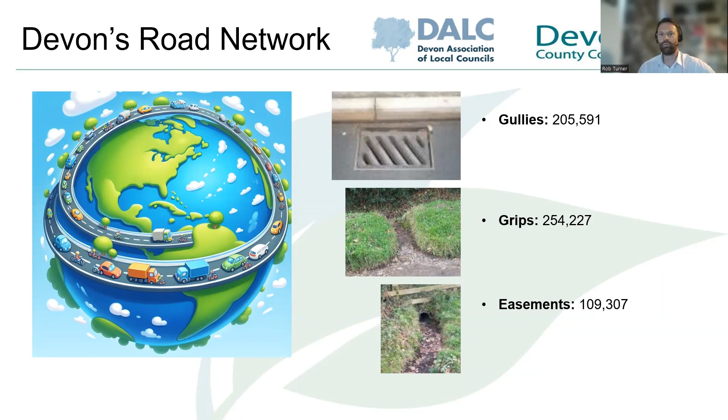You'll also note on the right-hand side here, drainage is always topical. Some of the words in that word cloud, you're probably thinking, what on earth is an easement or a grip? Hopefully that picture will tell you what they are. But gullies, we've got over 200,000 of them. Grips, over 250,000, and easements, over 100,000. We're talking big numbers here, which we have to maintain. So next slide.

So how on earth do we go about that? As well as a legislative framework, we have a code of practice. You can see the latest version there, the Well-Managed Highway Infrastructure Code of Practice. Although it's not a statutory requirement, DfT advises that local authorities follow the code to meet their legal duties to maintain the network. The key takeaway from that code is it promotes the adoption of an integrated asset management approach, which we'll come on to.

Authorities also need to develop asset management policies, strategies, and plans. These should be based on a local risk-based approach, resulting in the development of appropriate maintenance strategies. Okay.

Just highlighting the bottom thing, which is about the incentive fund. In terms of asset management, and we'll explain what that is in a minute, I think it was 2015 that they released the incentive fund, and authorities were given extra money depending on what band you were in, based on how you could demonstrate that you'd adopted asset management approaches. Devon got into band 3, so we secured the highest available funding. We'll go to the next slide, please.

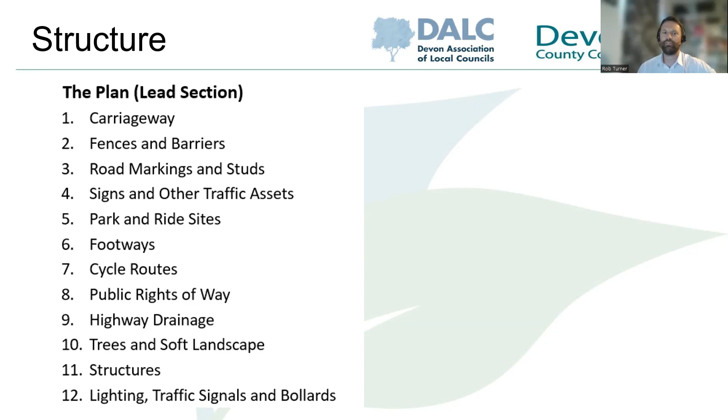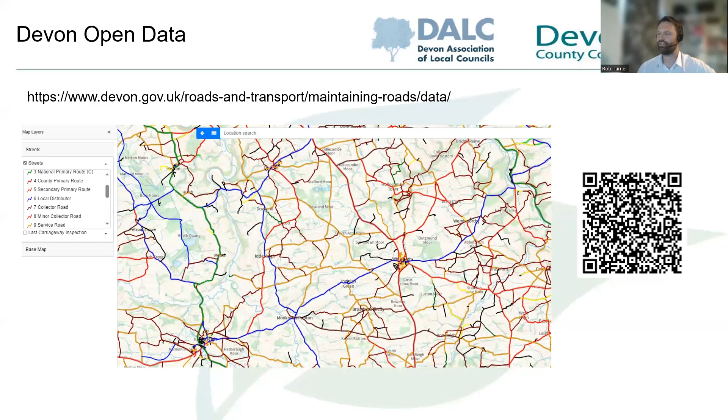So you can see what maintenance category the roads are. This is publicly available as well. So you can go on via that link or that QR code there, and you'll be able to see which maintenance category the various roads are. The little table on the left there will tell you what maintenance category, so you can zoom in and find out which roads are what maintenance category.

Okay, next slide again. So what does that mean in practice? So we mentioned all those different asset groups. This is from our carriageway annex of our asset management plan. So you'll note here that there's different expectations. So again, it's that risk-based approach. We've got different expectations for different maintenance categories. We call that levels of service. So we have different levels of service that we expect.

So you'll see there on the top, it moves from provision of safety related issues only, all the way up to provision of safety, serviceability and sustainability. So we're looking at a carriageway with very localized repairs of defects of a non-safety nature. To the other end, we're looking at uneven, rutted, with multiple repairs and defects of a non-safety nature. So you'll see the pictures there. You see the extremes that we're managing.

So on the right hand side there, that's the A361, North Devon Link Road. And on the left there, you've got a very typical rural minor road. In the middle there, you'll see how that works then. So again, pretty common sense. The higher maintenance categories, like the A361 and the A roads, the level of service we're trying to get to is in that green category. And as you move down our maintenance categories, the expectation and the level of service that we are looking to achieve reduces.

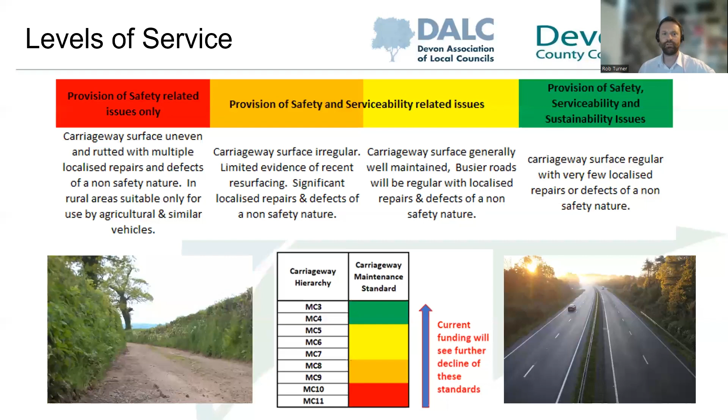What is key to all of this, though, is the level of funding. We've mentioned that quite a lot, but it depends on the level of funding we can have. Think of it as turning a dial. So the more money we get, the more we can move that level of service up. The less money we get, that continues to move down. So the level of service we can achieve moves down, and it moves to more of our network. Okay, so next slide.

We've got resilience and emergencies. This involves managing disruption, implementing recovery measures for severe weather emergencies. And then we've got the winter service maintenance strategy, which involves maintaining in adverse weather conditions, such as gritting, snow ploughing. Hopefully not there yet, but we will be getting there soon.

It is getting a bit cold, isn't it, of a morning?

And then we've got routine cyclical maintenance, and this involves activities like gully emptying, grass cutting, cleaning, those routine activities. And then that goes on to planned maintenance. So that involves planned schemes, primarily of reconditioning, structural renewal. And then we've got preventative maintenance, and that involves activities aimed at preventing deterioration and extending the life of assets. And then we've got reactive maintenance, and that involves responding to safety related incidents and reports, defects, potholes, obstructions.

We're going to quickly go through now. So we'll go through planned, preventative and reactive, and sort of give you an example of the kind of maintenance that involves. Okay, if you want to go on to the next one again. So the first one I mentioned was planned maintenance. So that involves the renewal of the surface course layer of the road, and where necessary, depending on the level of the damage, reconstruction of the deeper structural layers.

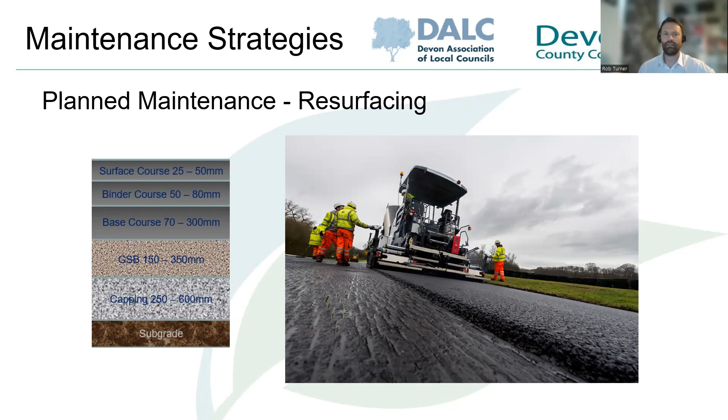We've got preventative. So as mentioned, resurfacing is not really financially sustainable, and ultimately it's a sign that we've got to that road too late. It's deteriorated too far. So ideally what we want to do is intervene earlier and stop it deteriorating to such that level in the first place. And that's where preventative maintenance comes in. So it's important that the road surfaces are sealed to prevent water ingress and prevent road deterioration. That's your main cause of road deterioration.

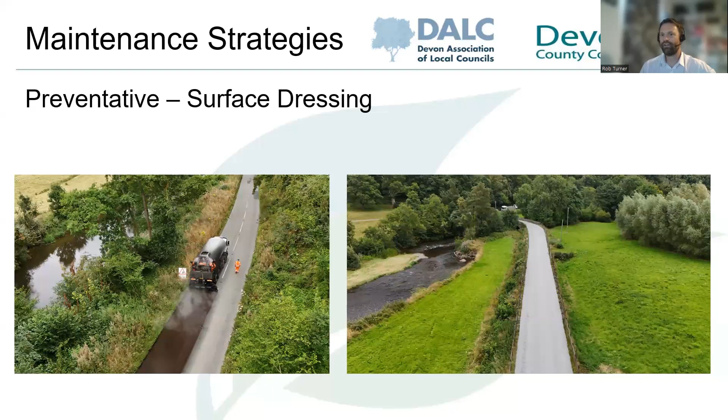So surface dressing is a process of sealing the surface, improving the surface texture, and prolonging the life of the road for many years. It's speedy, efficient, economic preventative maintenance. It's more rural based, so more based on the rural network. Doesn't alter the level of the carriageway. It doesn't last as long as resurfacing, however, it costs considerably less. If you go to the next slide, we'll start it off early.

So it's quite a nice overall view, and see if I know where this one is actually, so we will see what part of Devon this is. Makes me want to visit it, to be fair.

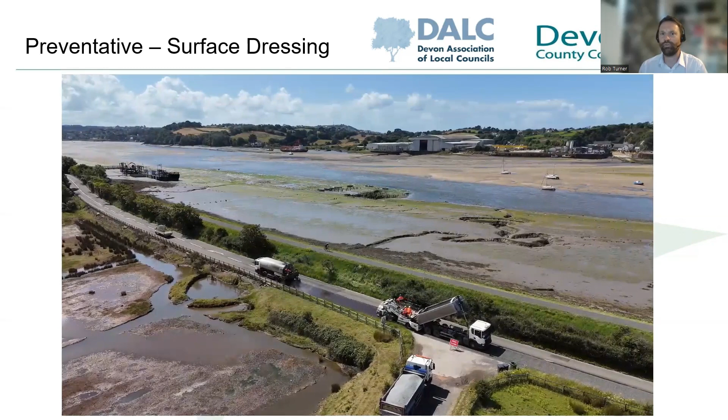So what we've got here then, you'll see a calibrated tanker sprays a thin film of hot bitumen onto the road, and then a metered spreader puts hard chippings onto the bitumen. These chippings are then rolled and pressed into the bitumen to form an interlocking surface. The road can then be driven on with care, with any loose chippings swept away as part of a sweeping regime, and then the road markings replaced. Okay, so you can see that process just happening there. So if people aren't aware, this is Instow, around there. Okay, so I think you should probably stop that video. It's probably enough to illustrate the kind of process we've got there.

Okay. There we go. So we've got a more urban based version of the same concept. So again, working on the principle of sealing the road, improving the surface texture. So this is micro, more urban. This is a dual process application. So the first process regulates the existing surface. The second one provides the final surface. So the surface doesn't need to be rolled, with traffic helping it to achieve the strength. So it needs traffic driving on it. As the surface is slightly raised, the ironwork is raised afterwards, and sweeping again is undertaken and lines go back.

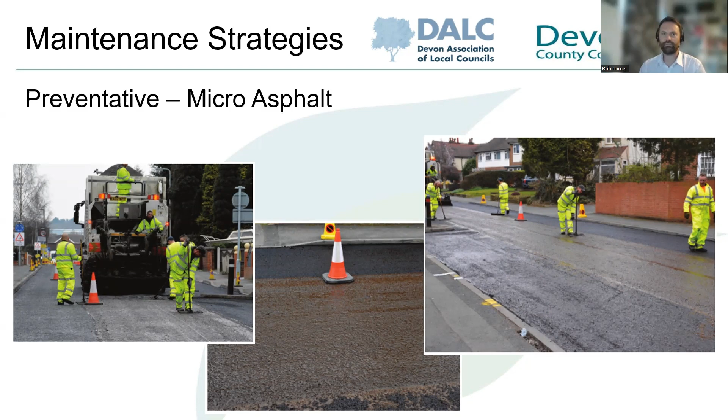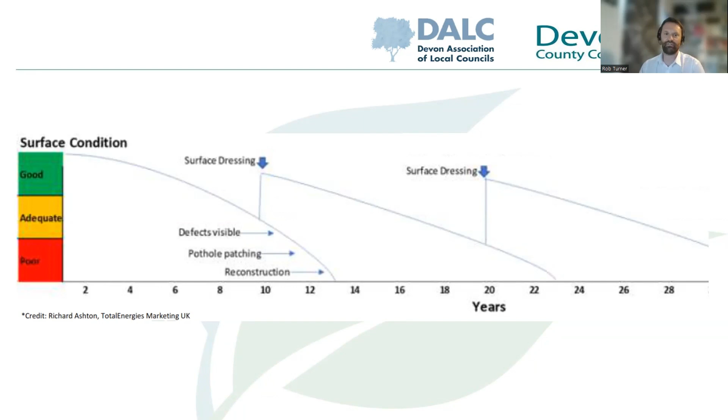But the public will say, well, why are you doing this road? It looks fine. That road's fallen apart. We can't tackle all the ones that have fallen apart. We need to have a mixture of strategies, which I guess is the key concept of what we're putting across there from a preventative regime. Okay, the next one there, please.

So again, a number of factors, though, unfortunately affect our ability to make and implement long-term maintenance plans, such as preventative ones. So that deterioration curve, let's be honest, is very idealized. Lots of things affect that. So again, we've got climate change, inflation, the cost of our maintenance compared to 5 or 10 years ago has nearly doubled. We've got an evolved network as well.

We've got some roads which are, you remember the slide on the resurfacing, the makeup of a road? Well, not all our roads are made up that way. In fact, not that many. We've got a lot of our roads, our rural network, our lower category roads have just evolved from dirt tracks. So they haven't the structure. So again, they are going to deteriorate. That curve on the preventative side is very idealized, and therefore it will deteriorate at different times.

Traffic volumes have also increased, and we get very high traffic volumes at different times of the year as well, being a very rural county, with holiday makers, etc. The nature of the traffic as well. The farming vehicles have got bigger. The vehicles have got bigger. They've got heavier through electric cars, etc. All these things are making those deterioration curves more challenging and difficult to interpret. So you go to the next one.

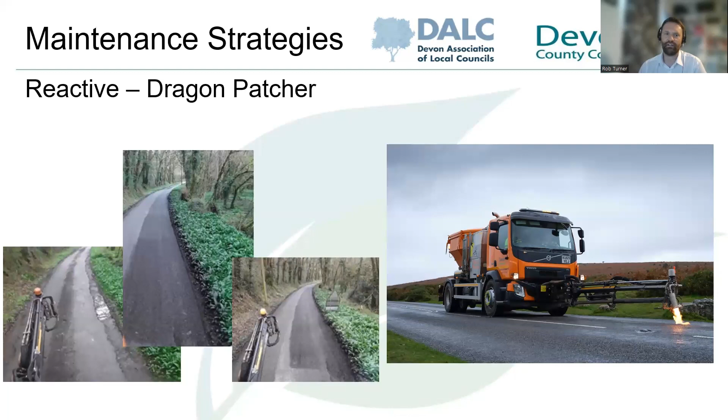So again, they won't last as long as the typical resurfacing, more holding the network together, but more than just potholes, extending that area that can be treated on a reactive basis. But this is still a reactive strategy. So not just filling those individual potholes, we're trying to make it go a little bit further. So again, next slide, please.

So this is, again, another arm of our reactive strategy, which is serviceability patching. That sees the provision of dedicated hand patching gangs across the county. These gangs are able to work on more of a reactive basis to address localized areas of carriageway deterioration using more traditional patching methods, generally up to 50 square meters in area. They're typically slower than the Dragon Patcher; however, they may prove to be more effective when more robust repairs are required, for example, where a more structurally sound one's needed.

So it gives more flexibility to the highway inspectors, allows for identification and capture of larger, more efficient interventions to pockets of deterioration. So again, it's not just those little tiny potholes. We're trying to expand these areas through different techniques, bringing in these different technologies. But again, they are not long-term solutions. They're holding the network together.

If we're able to seal it, going back to the preventative one, the surface dressing, if we can follow them up with a sealing of it. These ones are still going to get water and they're still going to deteriorate, but it's holding that one in, just doing better than just the individual. Okay. So next slide, please.

So I think that's the end of my part of the discussion. Hopefully it gives you a scope of what we have to maintain, how we go about it, how we make the decisions, how we prioritize things, and the different kinds of techniques that we use. So a bit of a judge here now to see what we've learnt. We've got 3 different types of strategies here: the preventative strategy, a planned strategy, and our reactive strategy.

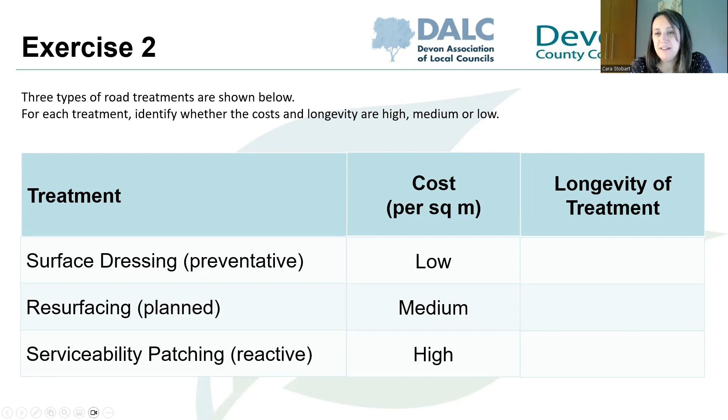There you go. So surface dressing, we said it was low cost, and it is. Resurfacing, medium, and serviceability patching, because of its reactive nature and having to go out there and react, it's always going to be higher per square meter. Could you remind us what the cost per square meter is? Do you have that data? Well, we've got kind of ballparks. So I guess surface dressing would probably be around £5.

Resurfacing, more about 40, 50, and serviceability patching at times up to about 100 potentially. And then we've got longevity of treatment. So again, surface dressing does last a number of years, but resurfacing is going to be the one that lasts for longest. Serviceability patching, as I mentioned earlier, doesn't last as long. It's still a reactive strategy. But if you follow it up with a preventative one, we can extend that life. Again, highlighting the importance of that preventative strategy and getting that across.

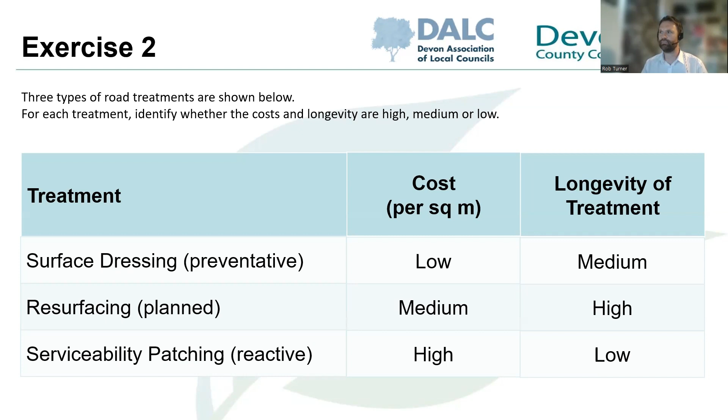Afternoon, everyone. There's 3 topics I wanted to go through before we finish and open up for questions. They are the information that's currently provided, the way we're managing the quality of the works, and topics of innovation that we're working on as well.

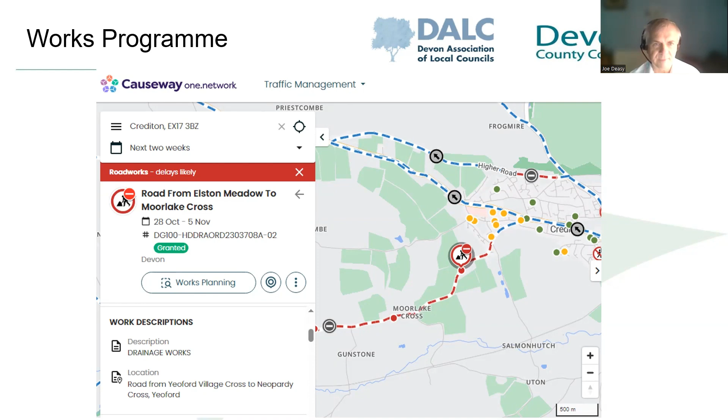This not only guarantees the safety and durability of the highway, but also significantly reduces the potential for future maintenance. Such assessments are vital for the longevity of the highway assets and for the protection of the authority's investment in the highway asset. Okay, next slide, please.

These audits are randomized, but if we see any patterns, for example, in a specific area, we notify the contractor and work is done to actually improve the information or what we're recovering from those audits about what we might want to address or fix.

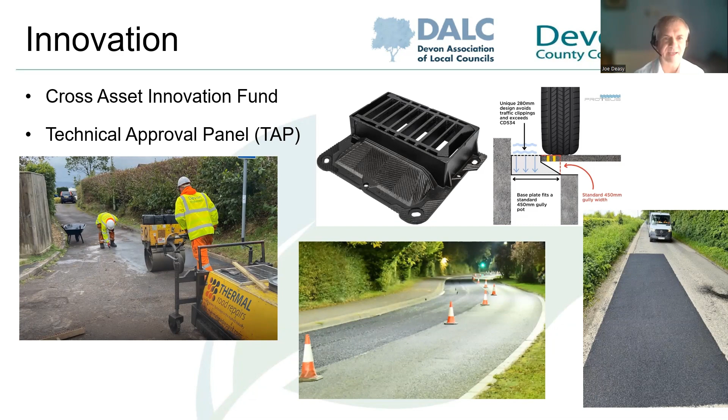Okay, thank you very much. One more slide, please, Cara.

And finally, there's just this one on some in situ recycling that's currently going on in the county. So again, it's another innovation with a focus on decarbonisation. It uses existing road materials, and a machine comes in and rotavates the existing surface, and we add both bitumen and cement bound material to that, and then we relay or grade that surface back in place and then cover it over with the surface dressing.

So again, it's a way of recycling the existing surface, reducing the amount of waste that needs to be taken away from site, and reusing existing material, which is very good for the environment in terms of carbon. So we're doing 6 sites of that around the county at the moment, and we'll monitor those over the next couple of years and see if this is something we want to add to the armoury for the future.

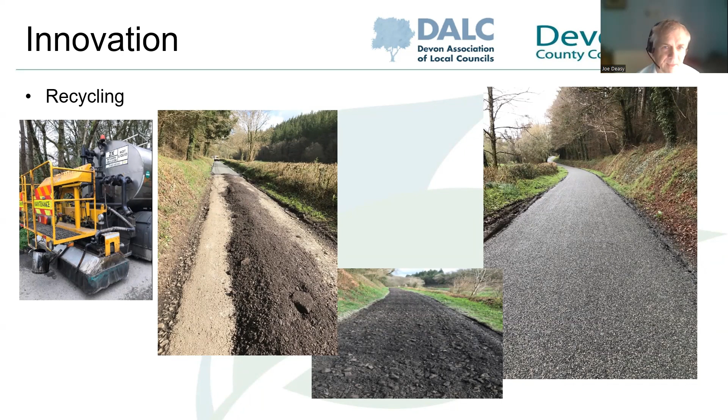Plymouth was brought to a standstill some few weeks back when a variety of roadworks in a variety of places gridlocked it because nobody could move off the side roads, and when they did, they all got wedged in up there. I totally get the idea that when you've got emergency roadworks, they have to be done, but when they conflict with existing projects that are going on and actually affect traffic movement around the places, is there any solution that can be put in place? Because people were absolutely livid that they couldn't get in or out of the town easily at all.

I've no idea is the short answer to that, because I don't suppose there is. But okay, hi Jane. I missed the first bit because it broke up. Did you say Plymouth? Yeah. Okay. So I'm not aware of the problems there directly, but I can find out, see what happened for you there. We have got another event in December, which is to do with roadworks and how that's going to go on. So we'll discuss that a little bit more.

But generally, if we do have roadworks and there are emergencies, they only have to tell us 2 hours afterwards. So a lot of work is actually put into that to try and prevent the issues that happen. And work may have gone on after that, but we will be focusing on that in our next session. I'm happy to take this offline with you because it's a separate issue.